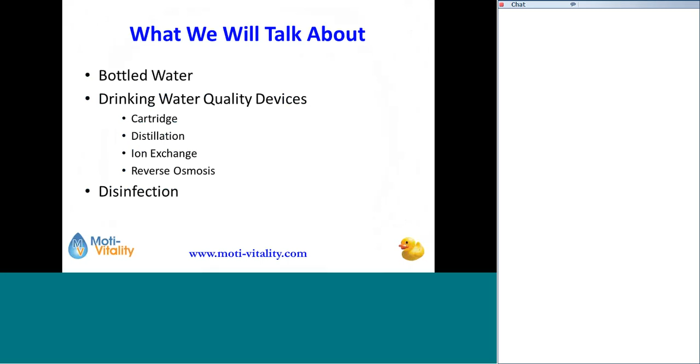I also want to mention that, thanks to modern technology, I'm giving this webinar today sitting in the phone lot of the Detroit airport waiting to pick somebody up. So I'm completely mobile, and everything seems to be functioning. I'm connected using an air card right now. But if by chance we have technical difficulties, then bear with me. I'll be back on. We seem to be good so far, though.

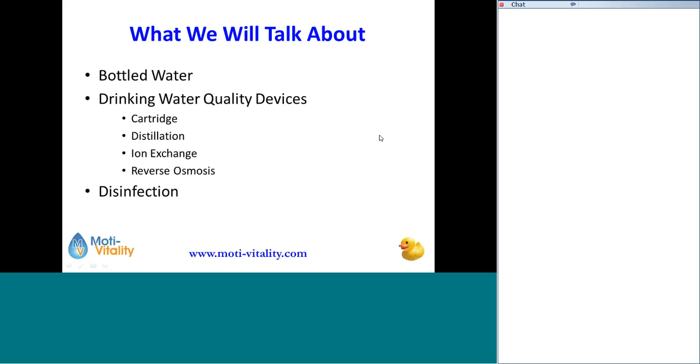that kind of fish. I put a fish in the toilet once, but I don't think it was doing much drinking. That's where they go, I think, when they decide to sleep for long periods of time. I put a fish tank up to watch the fish swim around. I don't want to just see them sleeping. They're going to sleep, they're going down the toilet. That's just not right.

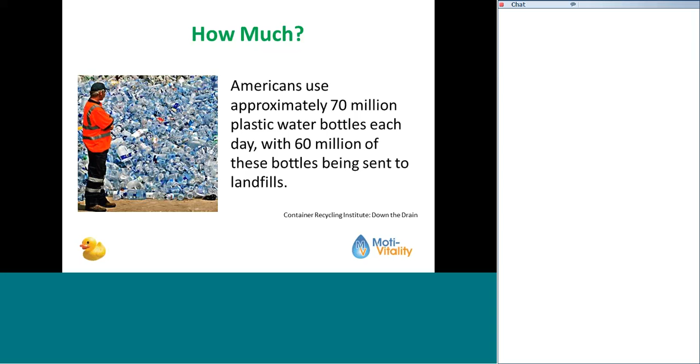Well, we use approximately 70 million plastic water bottles every single day, with 60 million of those being sent to the landfills. That is a lot of plastic. Okay, that's 25 billion, 500 million that we're using, and 21.9 billion going into the landfill every single day. Or I'm sorry, every single year. If we're using 70 million a day, then this is every single year.

Or if you want to put it into a smaller perspective, that means that we're throwing away over 41,000 plastic water bottles a minute. Every minute in this country, we're throwing away 41,000 plastic water bottles. That's pretty significant. Well, let's talk about this too, energy costs. It takes enough oil to fuel 100,000 cars per year just for the bottled water industry.

Now, you throw in all plastics into that. I've read that we use more oil and energy to manufacture, recycle, and transport all of our plastics in this country, when you combine them all, than we do in our residential vehicles. That's pretty significant. So what we do for a living in the water treatment industry is way more than just selling water softeners and drinking water systems. It actually makes a global impact.

And if you think about it in terms of a water softener alone, a water softener uses 70% less soap. That means 70% less plastic to store the soap in, which means 70% less transportation, the gas that it uses. There's a huge carbon footprint there. That's probably hard to measure in reality, but what we do does make an impact. But today we're talking about the drinking water side of it.

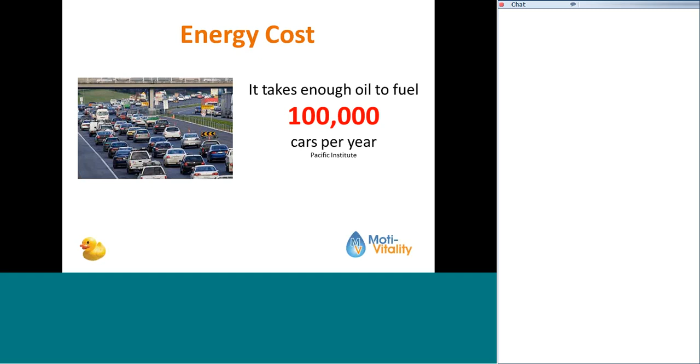And just on the bottled water side of it, we could power 100,000 cars per year with what we use to manufacture and recycle bottled water. Air pollution: we're putting 25 million extra tons of carbon dioxide into the atmosphere from the bottled water industry.

So again, let me stress that it is not my goal to completely eliminate the bottled water industry, not even close. In fact, I strongly support the bottled water industry. I think that it serves a purpose in our industry. It is part of water treatment. When somebody is using bottled water, that is a quick and easy way to do water treatment.

As we in the Water Quality Association and in the industry focus more on things like final barrier, which is the buzzword that we're using legislatively and throughout the industry now, we're going to be hearing more and more about final barrier. Final barrier basically says that it makes more economic and practical sense to treat the water where it comes into the home or where it's being used than at a treatment plant. And so that's final barrier.

It's going to be a lot safer and a lot more economically sound to do that, and that's where the industry is going. Bottled water is a final barrier option for sure. It is an option for water treatment. My goal is to reduce the amount of bottled water that we use in this country by half. If a family is buying 4 cases a month of bottled water, I'd like them to cut it down to 2 cases.

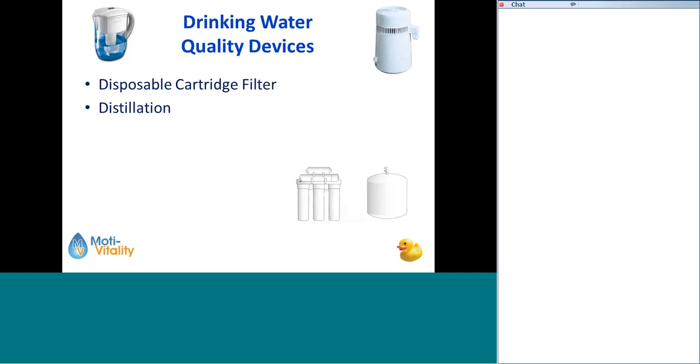It doesn't do it. So, but they are definitely part of our industry. There's no question about it. So you have the disposable cartridge filters, you have distillers, deionizers, reverse osmosis systems. So let's talk about the disposable cartridge filter first.

They come in several different varieties. Some have carbon in them for chlorine, a lot of them do. Some have automatic shutoffs or meters, so you know when to change them. A prime example of that is the filter that comes in a lot of the refrigerators that are out there. They have a little light on them that tells you when it's time to change that filter. A little reset on there. So some of them have automatic shutoff, some of them have little lights on them, but that's not uncommon.

They should be changed regularly. That's one of the problems, is that customers often won't change these things when they're supposed to. They definitely should be changed regularly, and the more stuff that's in the water, particularly if you're on a well. If you're on city water with TDS of right around 100, then that's what that refrigerator filter is designed for, to take that chlorine out and help the water taste a little bit better.

If you're on well water and you've got that refrigerator filter with 500 TDS in the water, the more stuff that's in that water, the faster that filter is going to fail or clog. And it will actually start putting more stuff in the water than it's taking out of the water, because as the carbon desorbs, then you'll actually notice the TDS is higher. In fact, it doesn't take long for that to happen. Check the TDS sometimes coming out of the customer's refrigerator versus the TDS coming out of their tap, and it's almost always higher coming out of the refrigerator if they've been using the refrigerator filter for any length of time.

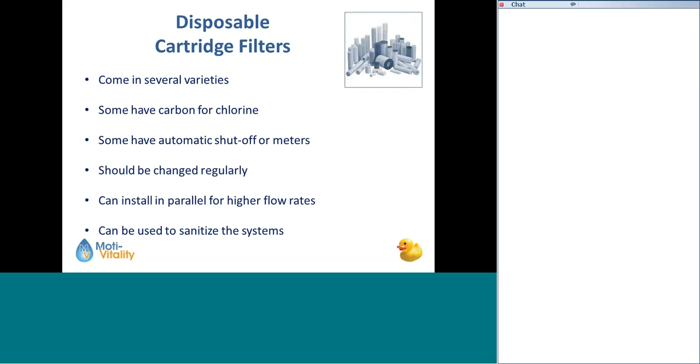You can install these things in parallel for higher flow rates, and one of the things that I like about having a cartridge filter is, especially if it's on after equipment. So you would put a carbon filter in the house just to kind of polish up things. Even if you just have the housing itself on after your equipment, this gives you a great way to sanitize your entire water system line, because it gives you access to your water line. So you can chlorinate your water heater, all the water lines through the house, because you can open those lines up, put a little bit of bleach in that filter housing, and run that through without having to bypass your softener or your equipment.

In terms of a cartridge filter installation, the best location for a carbon filter is where the water is going to be used for drinking and cooking. So that's why you see that at a refrigerator. Sometimes you'll put it right underneath the sink. Sometimes they'll have a separate faucet on there. The little faucet-mounted filters will hook right on the faucet. They'll screw on the bottom of that faucet sometimes. That is a cartridge filter, same thing. A lot of times they have a switch that you'll turn on for drinking or cooking water and off for washing dishes.

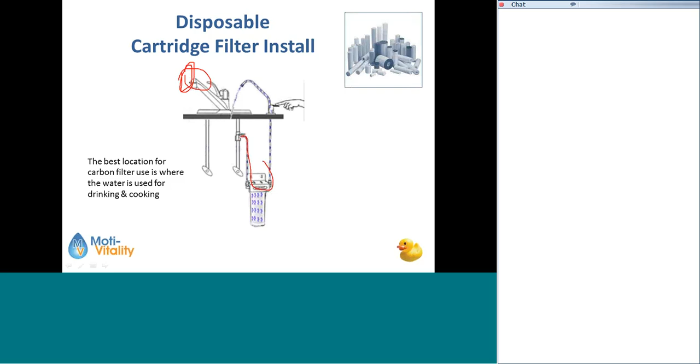This is your parallel install. If you're installing them in parallel, now these valves are off, I noticed on this picture for some reason, so the water's not going to be doing much at all. But if you were to turn this on, then that water would come down. And the reason you would install this in parallel is for higher flow rates.

So water comes down and it gets here and they're like, oh man, which way do we go? I don't know which way to go. Tell you what, you go this way and we'll go this way. And they split up, and so these guys go down through here and they get filtered and they come back out, and these guys go down through here.

Same thing, they come back out and they go over here, and then they meet back up in the middle. I'm like, hey, what did you guys do? I don't know. We just lost a bunch of our crap as we had to go through all this black stuff. It was weird, but still a lot emptier now. Yeah, me too. All right, well, let's go on in and get drinks. And then they go on into the house like this, right?

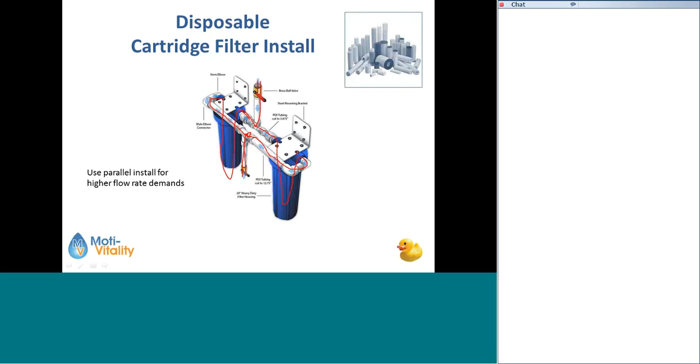I don't know for sure if that's what the water says, but as usual, you guys have been with me now for 2.5 months. You know that that's what happens in my head. Whether it happens in real life or not, who knows?

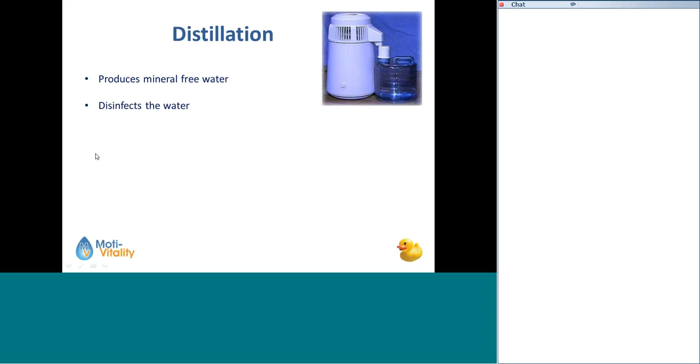Okay, so a distiller. The way distillers work. Distillers do produce mineral-free water. They do also disinfect the water because they heat that water up, and no pathogenic bacteria can survive in hot water like that, in boiling water. So it does disinfect the water. It works like the Earth's evaporation cycle. It just does it a little faster.

And it uses 4 to 7 gallons to produce 1 gallon of water. So there is still some waste there. A lot of times people think that there's no waste at all, but there is still waste with a distiller. It needs to be cleaned because of the precipitate left when the water evaporates. So I'll show you that on the distiller here when we see that. But you are going to have buildup, all the TDS, all the stuff that's in the water. It is going to build up.

You do have a buildup, particularly if there's calcium in the water. If you have a lot of calcium, you're going to get a crusty buildup because remember, heat exacerbates that reformation of calcium carbonate. So you do have a hardness scale buildup more in heated water than you do in cold water.

Distillers typically can produce 3 to 12 gallons a day of water, which is usually enough for a customer to drink. That's fine. But they do take a lot of energy because you have to have that heat constantly heating that up. Here's how a distiller works. Okay, so the feed water goes in, and it comes up through here. Now, this is a heat exchanger. It starts to heat. This little chamber right here does 2 things. Number one, it starts to heat up the water coming in, but it also cools the water going out. Okay, so we'll get to that in a second.

So the water comes up through here, and it started to warm up a little bit because it's taken some of the heat from this water that's already been distilled, and it goes down in through here. Now, this water reservoir, you've got a heating element down here, and this guy is heating the water up, creating vapor. So this water heats up and it creates vapor, and you have steam or water vapor, and then you have a vacuum up here that sort of sucks the vapor up.

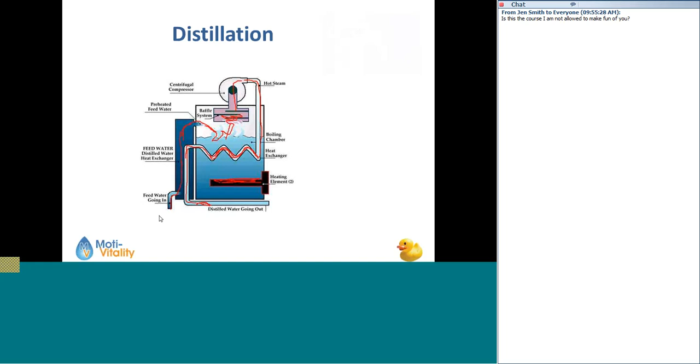The deionizer, now we've seen these things, a lot of times these are disposable cartridge filters. And what they do is they combine both cation resin and anion resin, maybe in 2 separate compartments in one cartridge, or maybe they'll have a couple different cartridges, but the cation resin takes up the positively charged ions, and the anion resin takes up the negatively charged ions,

and that also will give you mineral-free water. Now, it's not going to do anything for bacteria or VOCs or anything like that unless it has additional filters, but it will give you mineral-free water. It's not going to do anything for organics, because organics don't carry a charge, so the resin is not going to work.

But an example of that, I don't know if you guys have seen the ZeroWater filters. They have them at some of the stores. A lot of times they market them with a total dissolved solids meter. A little TDS meter comes with them. So if ever you lose or break your TDS meter, go buy that Zero thing, and you'll be able to get a TDS meter really fast. But it does produce mineral-free water.

Now the problem with some of those little ones is you've got such a small amount, and if you're running well water through there with high TDS, it's going to exhaust the resin in those cartridges really fast, and there's no way to regenerate them when they're disposable cartridges like that. So I think they're counting on the marketing sometimes, because people test it: oh yeah, it has 0 TDS, and if they tested it a month later, they would see that the TDS is quite a bit higher because the media is exhausted.

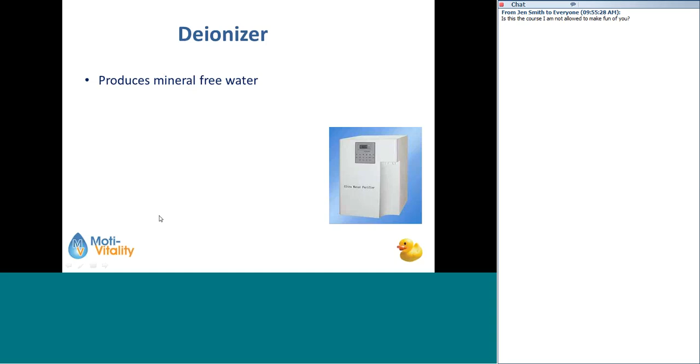But by that time, people are using it. They still think it works great. But they do produce mineral-free water. How long they last is going to be based on how much TDS is in that water. But they're usually a replaceable cartridge, the deionizer. It usually will have a separate faucet, usually a mixed bed. They do require a deeper filter housing than your typical cartridge filter.

Now, there are companies out there that do exchange tanks, deionizing or demineralizing exchange tanks. You've got to be set up for that. The reason they do the exchange tanks is because to regenerate these things, bring them back up to where they're able to deionize again, you have to use some sort of acid, usually hydrochloric acid, to regenerate the cation side, because you're using hydrogen to regenerate the cation side, and you have to use something like caustic, which has a lot of hydroxide ions, to regenerate the anion side.

And you have to have special licensing and a special place for that, because those things are dangerous, they're toxic. So they'll do an exchange tank where they'll just bring that tank in and exchange it out however often is needed. No drain necessary if you're doing that with the customer. They just simply unscrew one, plug it in, take the used one back to the shop, regenerate it, and then have a constant cycle of reusing the tank.

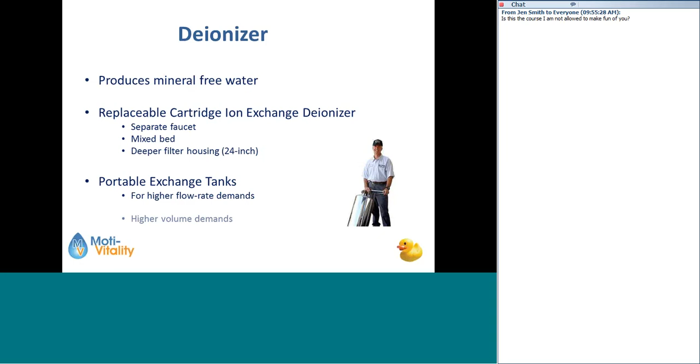Okay, reverse osmosis, which is probably the most cost-effective and efficient way of producing water nowadays, and probably the most prominently used in our industry in terms of giving high-quality drinking water. There are still distillers and deionizers and stuff like that out there, but I think reverse osmosis is, at least residentially, one of the most common ways of producing water.

Osmosis was discovered by a French scientist in 1748. Now, osmosis is a naturally occurring thing, so it wasn't invented. It just sort of happens naturally. It's how plants feed themselves. So they discovered it in 1748, and nobody did anything with it for like 200 years until somebody named Dr. S. I'm just going to say Dr. S. Dr. S at UCLA started working on artificial membrane.

What they originally started working on it for was desalinization, so desalting seawater. You've got places like California, for example, that have tons of water all around them, but it's all salt water. You can't drink it. So California also has water shortages because not only can you not drink it, but you can't use it for irrigation or watering the fields because it's got too much salt in it. So they started coming up with this as an idea for desalting seawater.

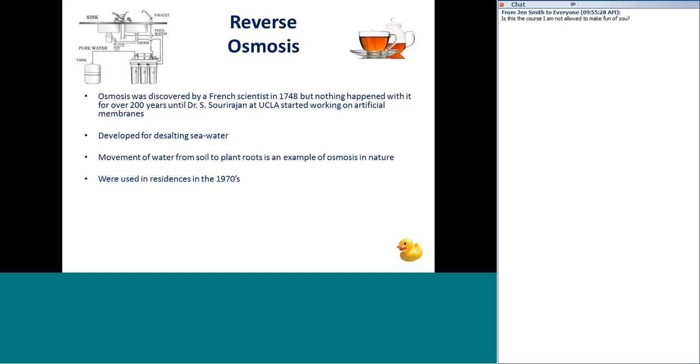Okay, daily water production has dramatically increased in the last several years. There are even inexpensive ROs out there that will give you, at least in laboratory settings, 50 gallons a day, which means realistically they'd produce probably 10 gallons a day in most residential situations. Just as a side note, the higher the water pressure coming in, the more water is produced with lower total dissolved solids. So the more pressure you apply to a membrane, the better quality water you get and the more water you get.

One of the things to note about reverse osmosis is it does not remove all the TDS. It gives you low TDS water. Now, it's sometimes not possible to do this, but it will usually impact the warranty if you don't: you should, if possible, supply the reverse osmosis system with soft, iron-free water. The calcium, magnesium, and iron, all this stuff is really hard on an RO membrane, so it will significantly reduce the life of the membrane.

ROs should be disinfected prior to the reverse osmosis. So that's the other thing, the reverse osmosis does not disinfect the water. In fact, you should not run bacteria through them at all.

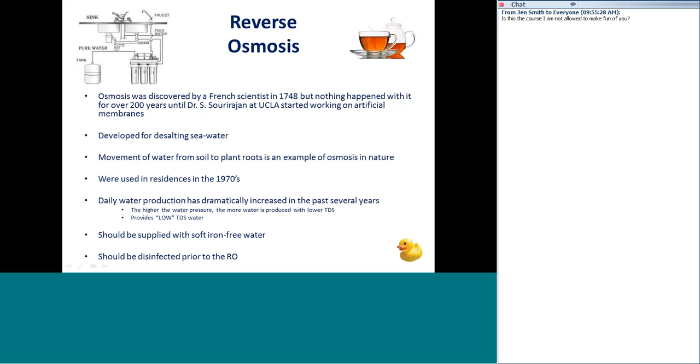Okay, here's the components of a reverse osmosis system. Now, this is a generic version of one. They have different configurations. Now, here's the one thing that I want to mention also: a lot of this is marketing. So you'll see things like, ours is a 5-stage RO, and then they're like, no, ours is a 7-stage RO. And somebody else is, ours is a 28-stage RO. You can count whatever you want as a stage. So much of it is marketing out there. Some people will count the faucet as a stage. Some people will add an extra hose filter as a stage.

So just because you cut a filter in half and now you have 2 carbon filters instead of 1, because you installed it in 2 separate places on the line. Whoop-de-doo. I mean, that doesn't really do a lot. The brains is kind of in the membrane. But here's a generic RO and the components that you find in most ROs.

You got your pre-filter. Pre-filter is usually a 5-micron filter. Human hair is on average about 80 microns in width, so this is going to take out about 1/16 the size of a human hair or larger. Just a pre-filter. If it's on city water, a lot of times that'd be a carbon filter as well. And in fact, here you have a pre-carbon filter.

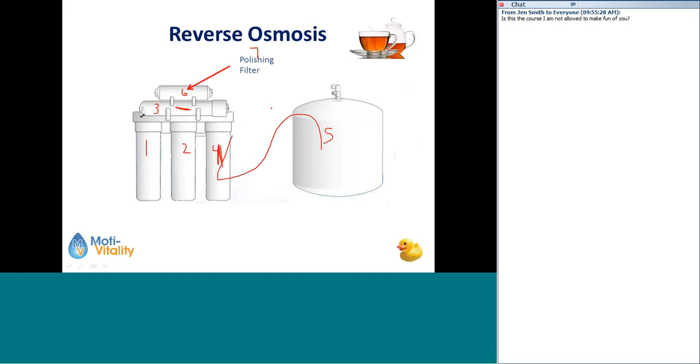Now keep in mind, most of these tanks are just like your pressure tanks. They are air charge tanks. So basically, what that means is just like a well tank.

So you'll have a bladder inside of this, and this will have air on the outside of it. So that's why, with the more pressure that's there around that bladder, a 3-gallon tank will usually hold only a gallon to a gallon and a half of water.

Okay, and as you start to use the water, you fill a gallon, make tea, and you fill a gallon pitcher up with it. You'll notice that water starts to slow down. That's because the more water you pull out of there, the less pressure is being pressed up against it, so the water starts to reduce.

Okay. This is just a chart. Again, I use this chart on my digital presentation to show just the different filter sizes. So here's where reverse osmosis is. Nanofiltration is here, ultrafiltration, microfiltration, particle filtration. If you guys want more details, look here at human hair, anywhere from 30 to 200 microns. This is visible to the eye right in here. This is reverse osmosis, so you're looking at the molecular level, right? So it's teeny tiny.

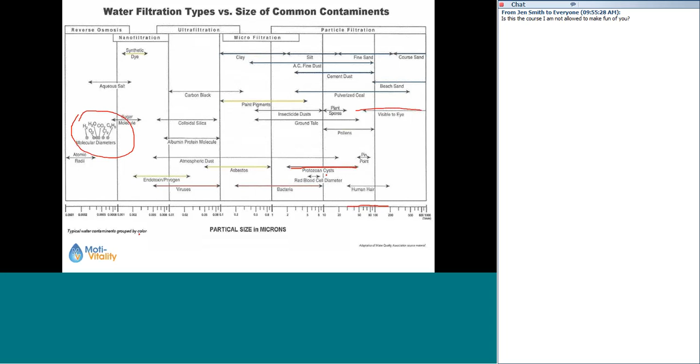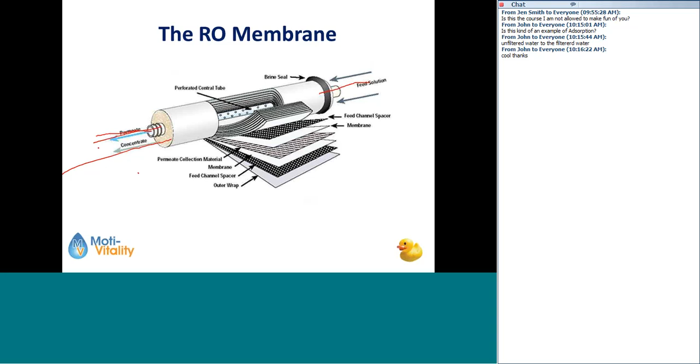Water disinfection: in order to qualify for disinfection, you should be able to destroy all types of pathogens. And remember, reverse osmosis does not have a disinfectant, so you need to disinfect through UV or any of the methods we're talking about here, usually before that RO, if you have a bacteria concern.

Let me go back a slide, because people ask all the time, why can't reverse osmosis be used for bacteria? Well, the holes in the reverse osmosis membrane are small enough to take out bacteria. The problem is that there's some evidence that bacteria can actually grow through the membrane. Bacteria a lot of times looks like this. If that bacteria hits the membrane this way, no problem, it's going to stop. But if it hits the membrane this way, then it may squeeze through that hole.

It also reproduces and can actually grow through that membrane. Worst case scenario, if you get a lot of bacteria build up on that membrane, then you create a film, which is a barrier that keeps water from being able to be produced. So reverse osmosis is not a good option for bacteria reduction.

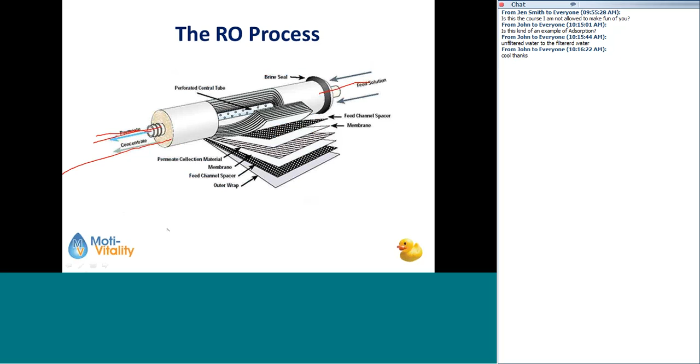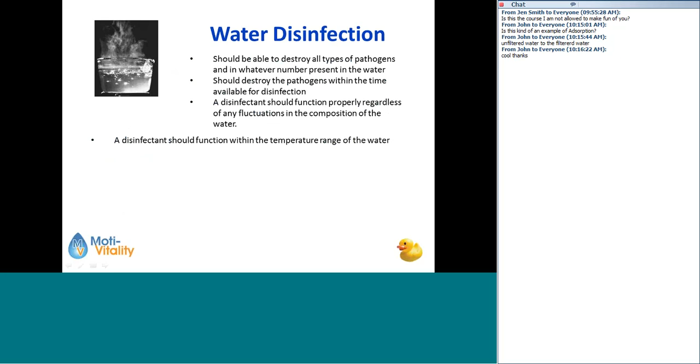Okay, in order to be a disinfectant, it should be able to destroy all types of pathogens in whatever number present in the water, within the time available for disinfection. A disinfectant should function properly regardless of any fluctuations in the composition of the water. It should function within the temperature range of the water. It should not cause the water to become toxic or unpalatable.

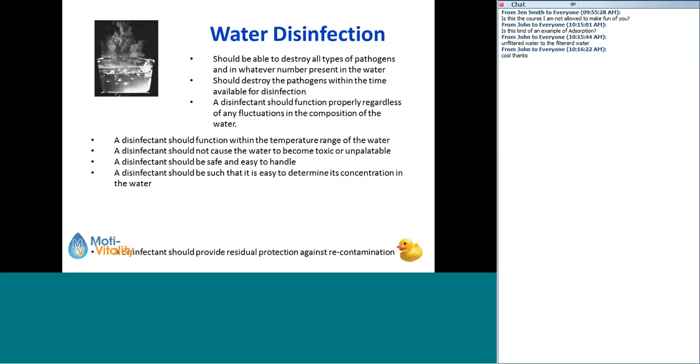It should be safe and easy to handle. It should be such that it's easy to determine its concentration in the water. And it should provide residual protection against recontamination. Boiling water is one method. You should boil for at least 1 minute. The minimum requirement for boiling water is 1 minute.

You will probably see that again somewhere. Don't know where that could be, but something tells me that you might see that 1 minute boiling thing somewhere again.

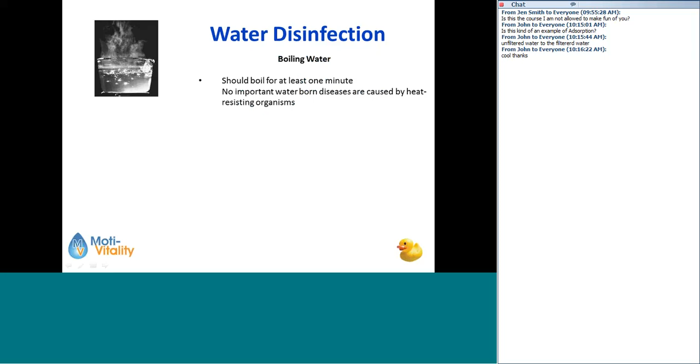No important waterborne diseases are caused by heat-resisting organisms. Ultraviolet light's another method of disinfection. It does work, works great. Imitates nature. The water has to be free of turbidity and color. Ultraviolet does not add taste or odor, but there's no residual effect with it. The light does gradually lose power too, so even though it's still lit up, doesn't necessarily mean it's still working. So a lot of them will have an alarm that tells you when it's time to change that bulb.

Bromine is used a lot for oxidizing or disinfecting swimming pools. It's not as bad on eye irritation or the odor. Chlorine is one of the most commonly used in the world. It's inexpensive, easy to transport. Should be removed from the water though. We shouldn't be drinking it, and it does absorb through the skin.

It comes in a couple different forms. You got sodium hypochlorite, which is household bleach. It's usually 5.25% chlorine. And then you got the calcium hypochlorite, or the dry granules. It's about 70%. And if you want to know the difference, stick your nose in either one of them and just take a big whiff. And then make sure you've got somebody around that can dial 911, especially if it's the calcium hypochlorite, because it will burn your lungs up.

So just so you know, Water Quality Association and Moti-Vitality, neither one sanction the idea of sticking your nose in a container of dry granules and taking a huge big whiff. Not something we recommend. But if you want to, then I guess it's up to you. Your nostrils, your respiratory system.

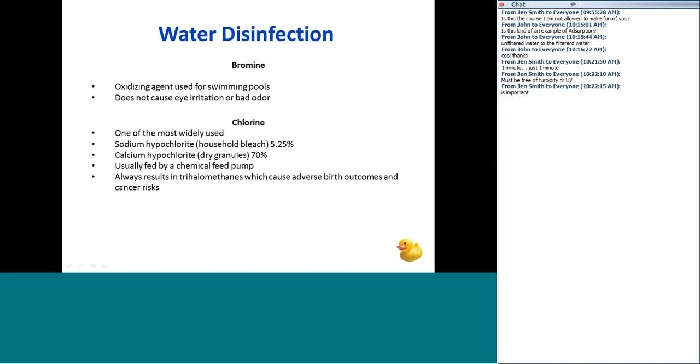Chlorine, in terms of disinfection, there's 3 terms that you should become familiar with and know. Chlorine demand is the amount of chlorine that will be reduced or consumed in the process of disinfecting or oxidizing the impurities in the water. Chlorine dosage is the total amount fed into the water. And then the chlorine residual is the amount of chlorine still remaining in the water after the oxidation takes place.

Question on UV, and explain what the book talks about with the steam from the UV being collected. I'd have to go back and review that. It's definitely going to heat up there, but I'd have to go back and review specifically what it's talking about.

The only thing I could guess is that if it's heating the water up high enough, they're collecting that to run into a drain. You might have a drain that's running into a floor or something, or maybe they're using it as distilled water somehow. Maybe some of them have a distiller component to it. I have to go back and review that piece. I don't recall seeing that feature on any of the UVs that I've been exposed to or put in.

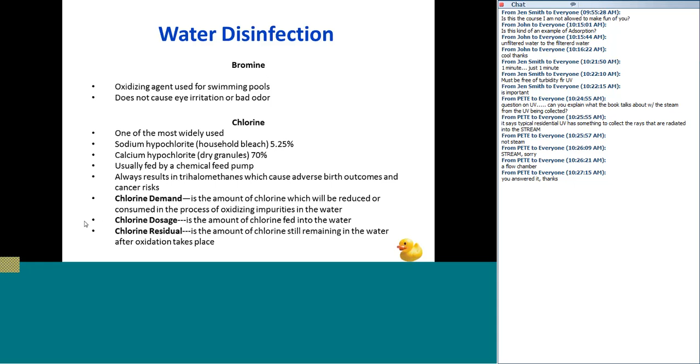Okay. Chlorine residual is the amount of chlorine still remaining in the water after it's disinfected. It's residual. Iodine, used in emergency situations. Not enough known about the human system.

We used to use iodine when I was in the service. They gave us these little iodine pills, and if in an emergency situation we couldn't heat the water up, we had to get water out of a stream. We'd drop an iodine pill in our canteens, and it would disinfect it. So maybe that's what happened with me, because I had to do that a few times out in the field.

And since we don't know specifically about the human system, maybe that explains the water voices in my head. Maybe that's it. Could be a study.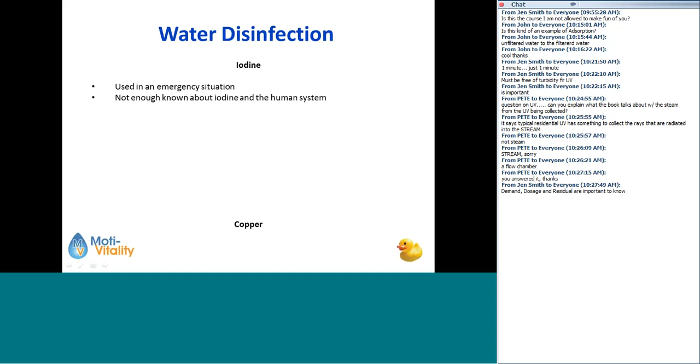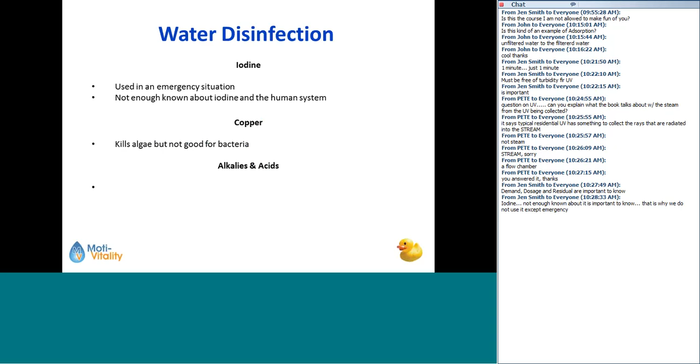Copper does kill algae. It's not good for bacteria. Alkalis and acids: disease-causing bacteria don't like high or low pH. If you're going to chlorine disinfect, a little bit more on that, it's best if the pH is between 6 and 7 on the pH scale. Disinfection is better with longer contact time. And then there's something called superchlorination. I always want to go, dun-da-da-da, superchlorination. It's a means to achieve greater disinfection with shorter contact time.

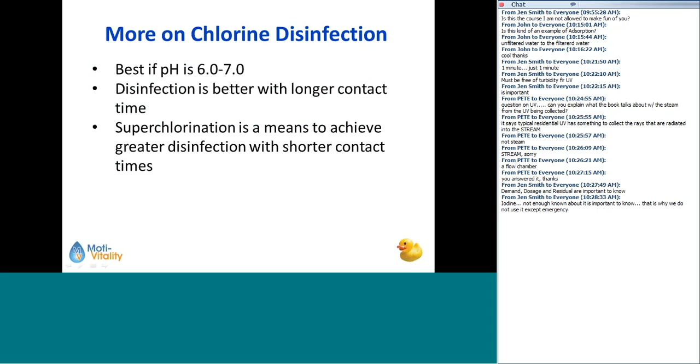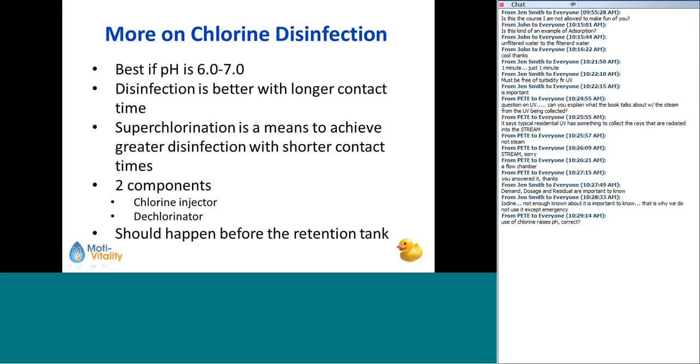But basically, it's where you put a whole ton of chlorine in there all at once, shock the heck out of it, and it kills the stuff a lot faster. You have 2 components of a chlorine disinfector. You have the injector and then the dechlorinator, which takes the chlorine back out, usually a carbon filter. And if you're going to do this, you should do it before the retention tank, because that allows for more contact time. And that, my friends, is the end of week 11.

Next week, we're going to be talking about equipment installation, and we're going to go through some water treatment questions and answers. Any final questions today? Use of chlorine, yes, it usually does raise the pH. Any other questions? That depends on how much is in there.

It's odd because chlorine generally we think of as being a base, because it is an oxidizing agent, but sometimes chlorine can actually read low on the pH scale. But what it really depends on, is that an issue? Typically on city water, you will see a higher level of pH, but the chlorine is not normally going to take it up really super high where that in and of itself becomes an issue. You are going to take that back out.

What it's going to depend on, remember what pH is. An acid is water that has a lot of hydrogen in it, and it's seeking substances that want to bind those hydrogen ions. High pH, or a base, is water or a solution that has a lot of extra hydroxide ions in it, and it's seeking out hydrogen.

How many gallons of chlorine are needed to disinfect the water is something I do not have memorized off the top of my head. It was in the disinfection advanced course. I don't remember that off the top of my head. If you'll allow me to, I will see if I can find that out for you. Okay.

But I know we studied that in the advanced disinfection course. I don't have it memorized because a lot of times I think, if I ever need to know that, I can go back and refer to it. That's not something that I use on a daily basis. So I don't know that answer off the top of my head. Any other questions?